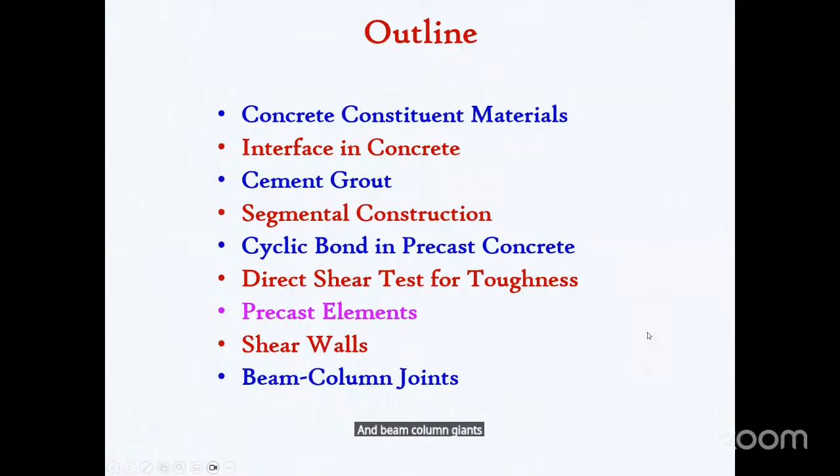The work involves a lot of other projects also, so consultancy or research or even interaction with other members in various fields. I'll talk something related to concrete constituent materials. Interface in concrete is very important, and cement grout related to precast construction. Briefing on segmental construction advantages and challenges, and the transportation system, bridge system, whether it is a reinforced concrete system or pre-stressing system, the cyclic bond in the case of rebars embedded in concrete. And the direct shear test for calculating or determining the toughness of the material, concrete, incorporated with various other ingredients. And the behavior of precast elements, shear walls, and beam column joints under earthquake loading and so on. Understanding the concrete actually.

So it looks like an old system, and we've just been reading here and there, somebody talking about this. But actually if you look into the constituent materials, the basic forms are like cement for binding purpose, sand and coarse aggregate for filling the volume, and water for reaction with the cement. So cement paste binds all the inert material. That was the concept or idea of using cement, water, and embedding all the large size particles.

Now along with this we come across voids, defects, vacancies, micro cracks, interfaces. And when you add something to change the characteristics in the early stages, like workability, compactness, microstructure, say high performance concrete, some kind of special material - this is very important for the engineer. These are all the things going to happen parallelly when you are going to manufacture or produce concrete. So each one of them will be a challenge. When you look into the individual things, a great study needs to be undertaken. It's not just one thing, because nowadays we find a lot of innovations in material technology.

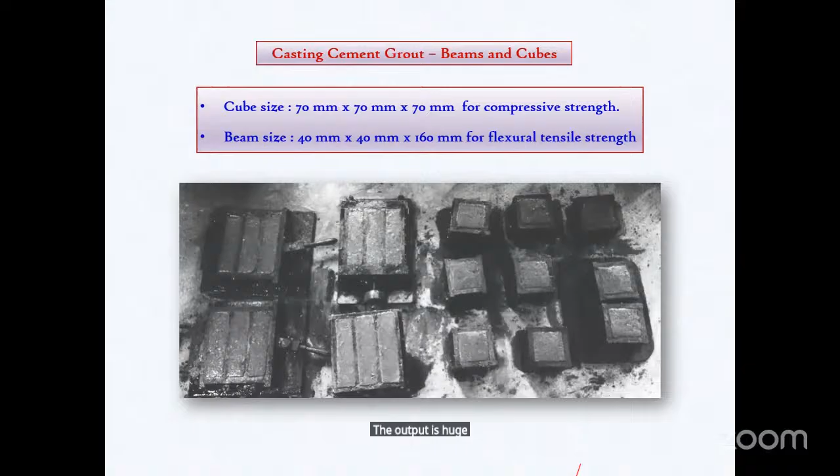So in this process, a product is identified and a very simple research is conducted in the laboratory. It's a preliminary investigation, but the output is a huge advantage for the construction industry.

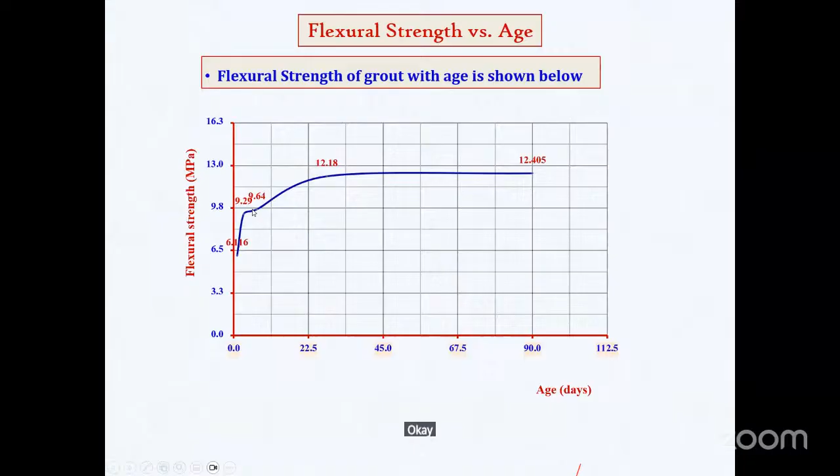In this process, we check the strength at early stages: 1 day strength, 3 day strength, 7 day strength, and also compare cylinders and cubes. All these were validated experimentally. For flexural tensile strength, at 1 day, 3 days it's 6.1, and at 7 days it's 9.2 or 9.29. It's a huge strength gain even in early stages.

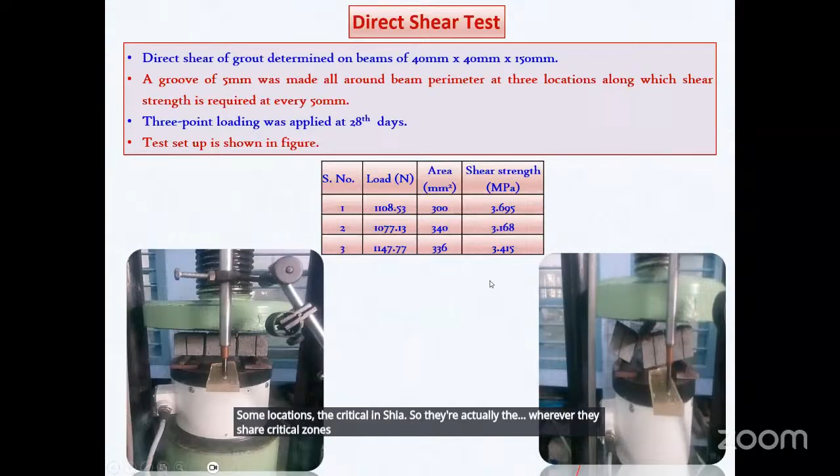This is the shear aspect, which is also very important because in all major constructions and structural components, some locations are critical in shear. So wherever there are shear critical zones, this cementitious product can be advantageously utilized.

Whenever the precast system is continuously exposed to environment, like rainy seasons for a week, you should be able to understand its water absorbing capacity, because this gives you the durability of the product. The aim is to have a structural system that lasts 100 years, not 50 years. So this property is very important - all precast elements exposed to or submerged in water should not absorb water significantly. This is another way of observing the quality.

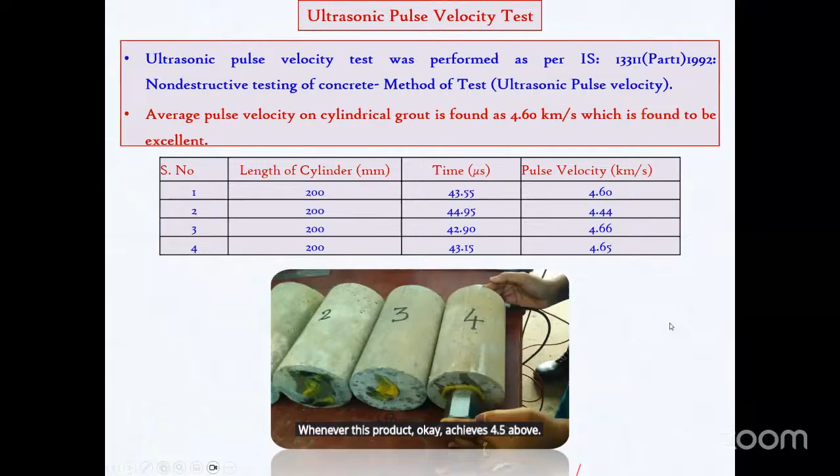The quality of concrete can be assessed by measuring pulse waves, that is sound waves, passing through concrete. This gives the density and the quality of concrete. Whenever this value achieves 4.5 or above, it is an excellent product to be used for special construction practices.

In flexural members with reinforcement bars in beams, the end regions are very important. The end regions of primary girders or deck slabs are subjected to very high shear force. Whenever the shear force is high, that means there is a high change in the bending moment, and the rebars will be subjected to very high horizontal stress, that is bond stress.

Sometimes if you don't provide sufficient anchorage length at the end regions of the beam bars, there is a possibility of pulling out of the bars. Particularly when aiming for structures to last 100 years, you have to be very careful, because end regions are vulnerable to pulling out of rebars, especially under high shear force, unless you provide sufficient anchorage length, not just development length plus additional extension.

In some cases, when the steel reinforcement reaches its full tensile strength, there is a possibility of pulling out. The end region should be properly anchored; if not, the bars will be pulled out. So the anchorage bond in such cases becomes significantly important.

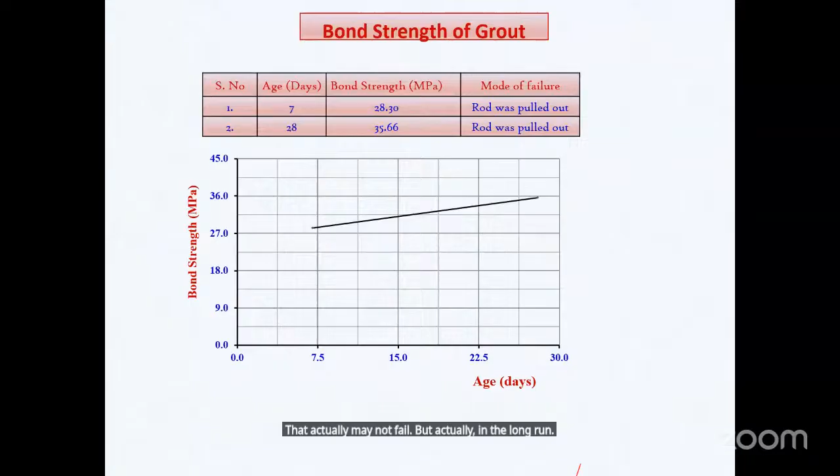When a bridge is designed for a particular defined load, and there is a possibility of accidental load, it may not fail immediately, but in the long run, the life of the structure comes down. So this cyclic bond response is very important. No code provisions are available now, but it is a kind of accidental load situation, since bridge structures experience very heavy loads.

Maybe it's a class A bridge, a class B bridge, or whatever. Sometimes bridges are not meant for higher loads but experience them anyway, and that is nothing but an accidental load for that particular structure. So what happens if a bridge structure subject to cyclic loading experiences an accidental load? What will be the outcome?

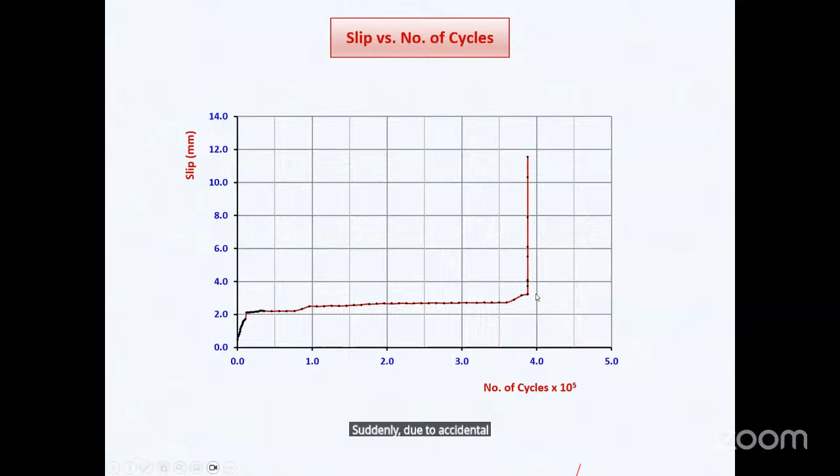From studies, when there is an accidental load, the slip exceeds the expected amount after a number of loading-unloading cycles, and the slip increases significantly. That means the rebars are pulled out of the concrete, and the structure may fail suddenly due to accidental load after a number of cycles. This is the slip versus number of cycles relationship: slip gradually increases with cycles, but suddenly due to accidental loads, the anchorage bars get pulled out.

This way, one can apply loading and unloading cycles. Loading-unloading curves can be drawn by applying the number of cycles, and one can study the bond stress. That is one thing.

What we found is that rebars, particularly in precast systems, flexural systems, primary beams, or even deck slabs like segmental construction, have end regions provided with skin reinforcement or stitch reinforcement, but due to cyclic loading, they may experience a kind of bond fatigue, so there's a possibility of failure.

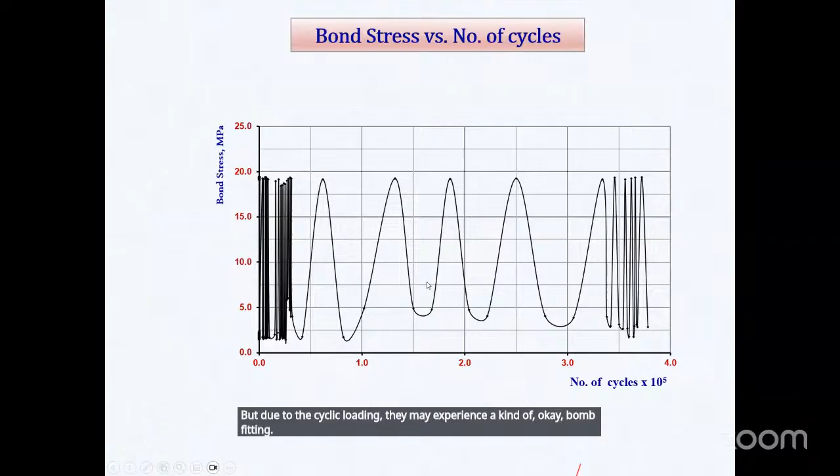An important point: when looking into research, a lot of laboratory studies on concrete specimens need to be done. There isn't much information about shear failure. Flexural failures are very clear and form the majority of research activities.

Studies on mode 2, that is the secondary shear failure, are limited because we don't flag it seriously; flexural moments are taken as critical while shear is taken as secondary. But sometimes shear is predominant, so members which experience high shear force need to fail in a ductile manner.

So for that understanding, in specimens failing in shear, what will be the toughness? That is the energy absorption capacity, the ductility of the system.

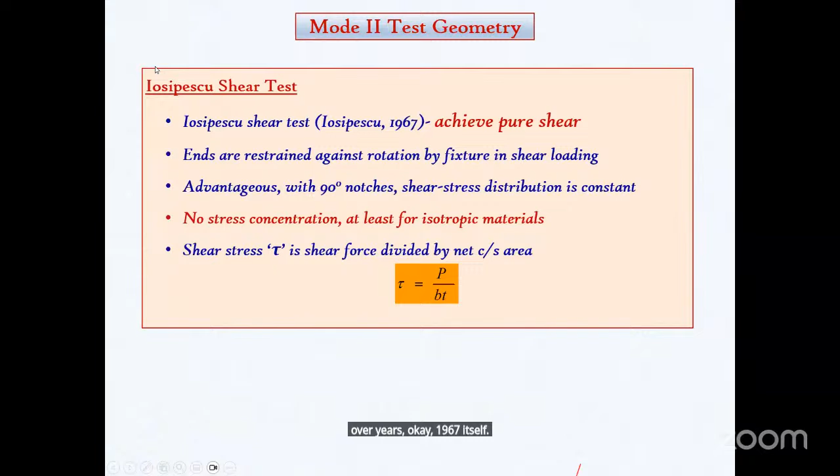In research, some specimens were already proposed over the years, as early as 1967. This one was proposed by a researcher, called the Iosipescu shear test. There are notches, with a support here and a support here, and the idea is to shear off this cross section.

But they could not achieve real shear failure. Later, someone changed the setup, but still they could not achieve real shear failure. This is the Bazant shear test, but again ideal shear failure was not achieved.

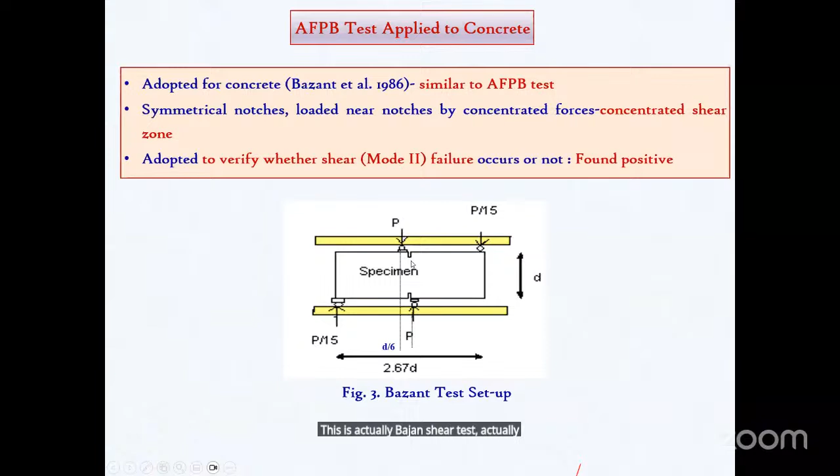After understanding this, a lot of papers were reviewed, understanding fracture mechanics, and a specimen was defined to define the failure plane. This is the geometry adopted, with the net cross section, and all around we have the notch.

A special supporting system was invented, and we could achieve direct shear failure here. There is no flexure failure, no mixed failure—just direct shear. This was special; a number of trials were made before we could finally achieve this.

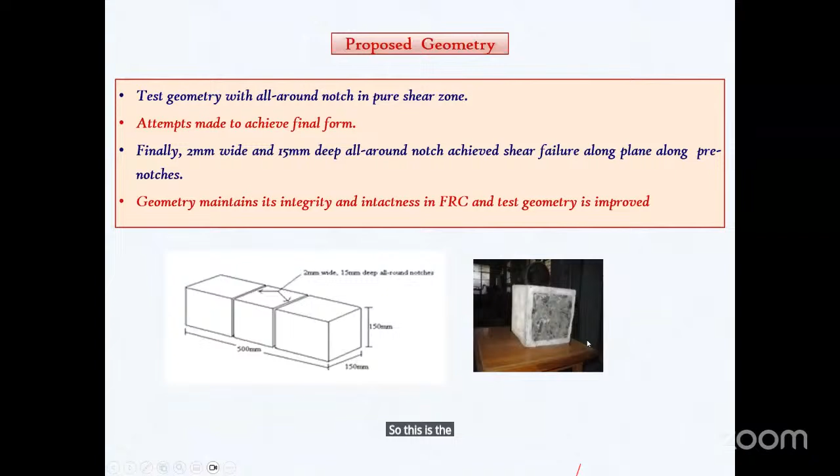Now, understanding the influence of randomly distributed fibers in plain concrete—because concrete is vulnerable to brittle failure in shear—to improve ductility in direct shear, the idea is to add a small fraction of steel fibers. Different mixes were proposed, everything the same except the fiber content: 0% for plain concrete, 0.5%, and 1% by volume of concrete.

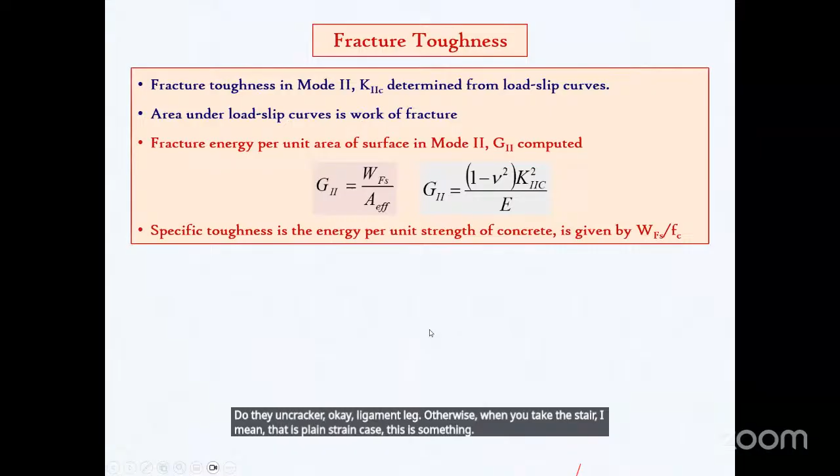So the energy absorption in mode 2, or shear failure, is the work of fracture relative to the uncracked ligament length, considering the plane strain case. This way the toughness of the concrete was investigated, and we found that as fibers are added to the concrete, it influences the failure mechanism and also the shear strength.

Shear strength increases, and there is an index calculated as the area under the load curve. As more fibers are added to the concrete, ductility increases, and after the peak load a longer descending curve is achieved. From there, the area under the load versus deflection curve is taken up to 3 times the deflection at the straight line part.

Delta is the deflection corresponding to the straight line, roughly elastic, part. We take the area up to delta and up to 3 times delta. So there is a larger area up to 3 delta divided by the area up to only delta, which gives an idea of how ductile the material is.

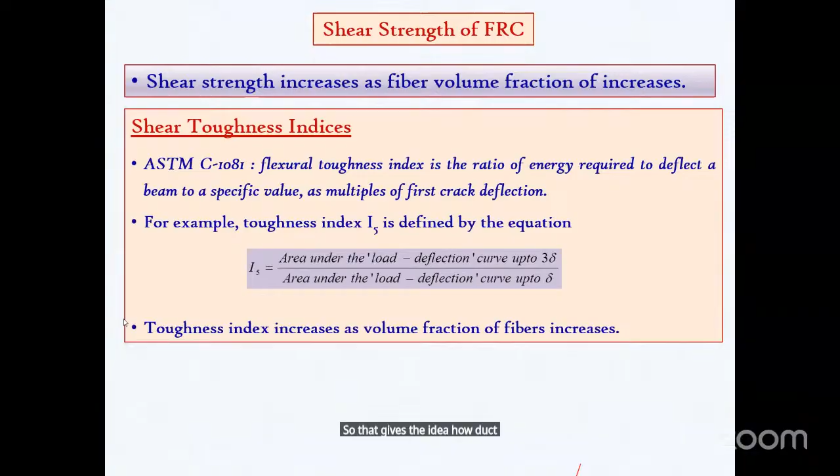So the toughness index increases with increase in the volume of fibers—not very significantly, but there is an improvement. Ductility is improved due to the addition of steel fiber.

Understanding the precast system is very important nowadays, because even since 1954 in other countries there have been standards prescribing the use of precast or pre-stressed systems. Precast systems are always accompanied by pre-stressing—they go together. Applications include building frames, parking structures, stadia, railway sleepers, transmission lines, and many other segments.

The precast system will be accepted everywhere you would otherwise think of cast-in-situ concrete. The only thing is, once you have the precast elements, bonding and connecting them together is important—integrating them. So we need to understand the methods to connect them, since weaker connections are possible.

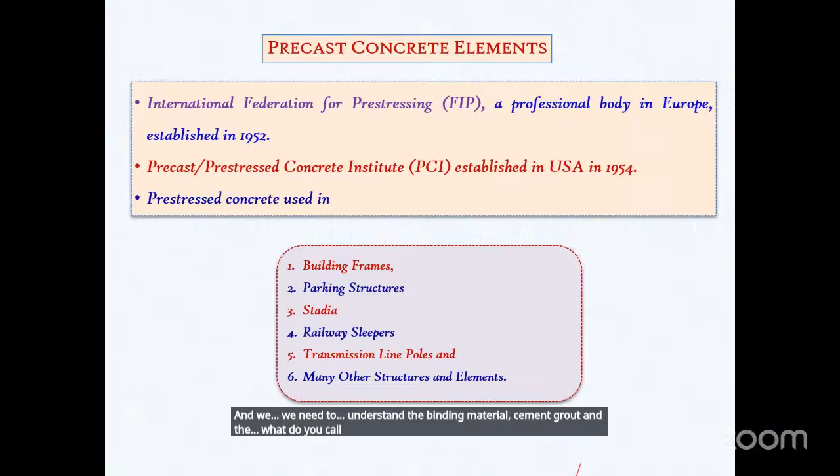We need to understand the binding material, cement grout, and the anchoring of the precast element—very important whenever we talk about this. In the market you'll find solid elements, and we can create hollows in them to reduce the self weight.

And whether you have the labor to connect them, skillfulness, or the materials required to join, and once you think about these things, what will be the maintenance of that structural system, and whether the components can be reused and recycled. It's not like yesteryear - now we have to think about whatever you do, that has to be replaced, recycled. So these are some of the factors to be considered when you think about any precast system.

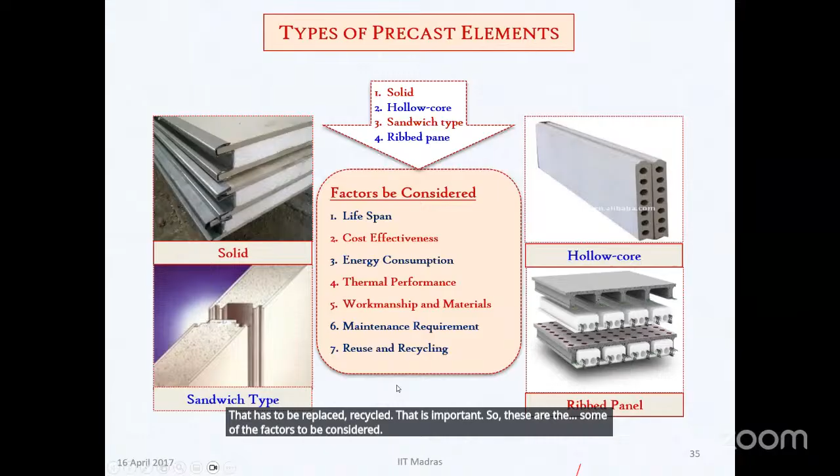But once all these important components are cast, leaving the reinforcement required, you can bring them and join them together, and the gap can be filled with grouting material, and the connections can be joined by stronger steel material.

When you look into this, the advantage will be speed of construction. Previously projects were delayed due to seasonal and environmental problems - in the rainy season it's completely halted, and you can have only 3 or 4 months effectively. But now, in any season, these elements can be cast under a controlled environment, and speed is increased significantly. So you can have the foundation, the casting of primary members, prepare all the members ready, before the aggressive environment or whatever seasons affect the practices.

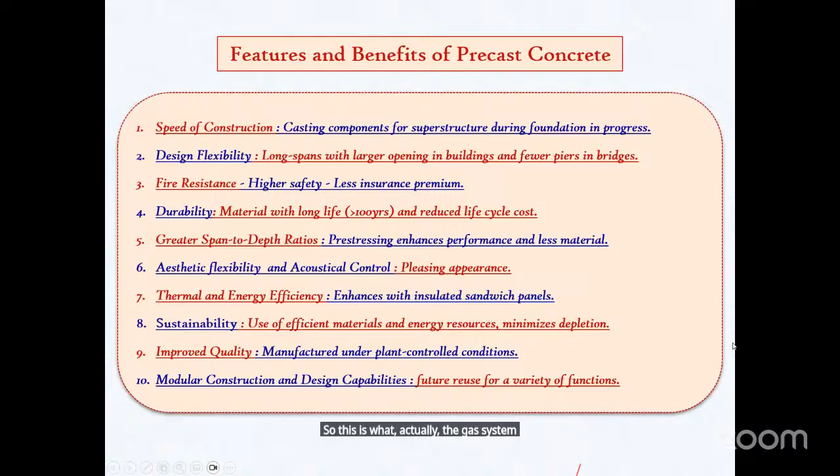So this is what the precast system actually is, and hence it has to be looked into with a lot of investigation and thinking. These are all some examples. So the precast element here, this widened precast system, and all these numbers of precast elements can be joined together to come out with an aesthetically, architecturally pleasing system.

This is something, runway is being constructed. Now, actually, the residential building or commercial building or stadia - we have the beams, we have the slab, we have the columns, we have the steps. All these things are readily made, required shape, required size. Only thing is, you know how to fix them. So we have to understand the fastening technology, connection technology, and the binding medium.

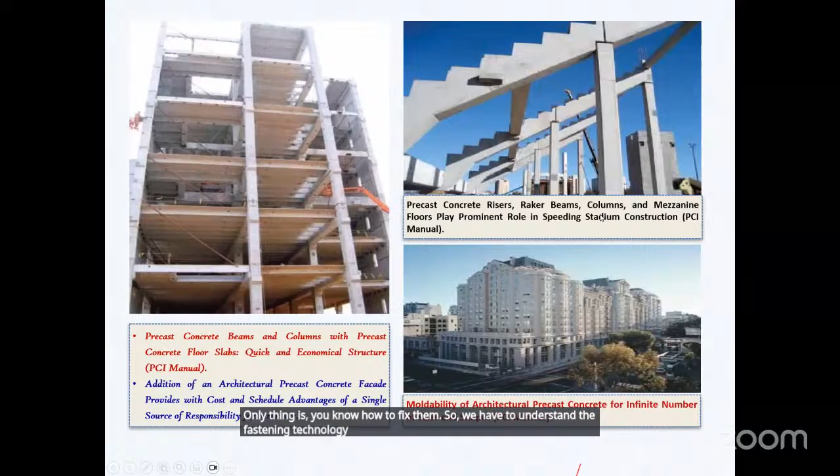This is something in mass construction - all these housing or dwelling units can be fabricated, 2 chambers or 3, ready-made, and internally everything can be provided. Now, this is something in mass construction, like you want to have similar spans, so there's a big advantage - lot of money being saved by avoiding different sizes or shapes. The same size, same shape can be produced and used, and aesthetically it will be very pleasing. And here the gap can be cleared or supported by readily made deck slabs.

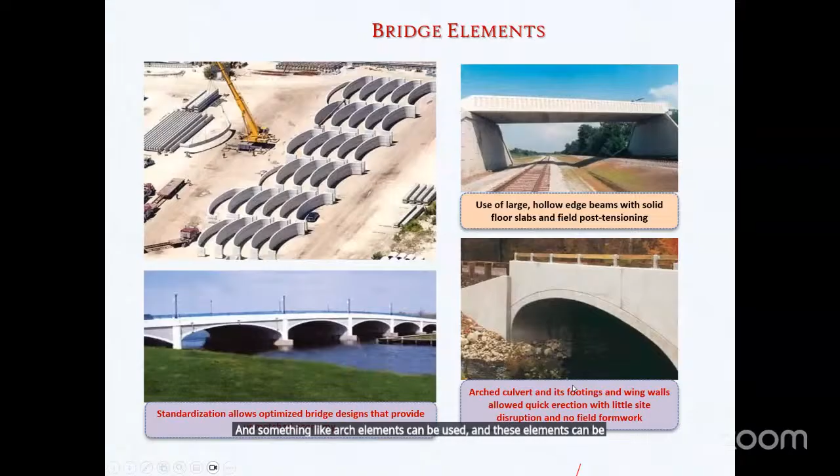And of course, the sleepers already know. Now, this is a typical bridge, for example practical. The foundation was completed, pier was completed, pier cap was completed, and these pink colors are the bearings. On the bearing, actually, the superstructure comes. This is like a 45 meter span, and this is the main part, the main waist, or the spine of the bridge in the longer direction, 40 meters, same cross section, but it may be curved, it may be changed, it may not be straight. But we have the left wing and right wing - elevations may be different depending upon the curvature.

So this is a typical cross section of a bridge, okay, a flyover. This is the main part, connected with the secondary part, the left wing and right wing. You have the precast element, segmental construction. All these segments will be connected by pre-stressing in the transverse direction. And all these yellow elements, called spine element segments, provided in the length direction, each 15 or 20 meters, are again connected using longitudinal pre-stressing. You do this, maintain the levels, and bring them together.

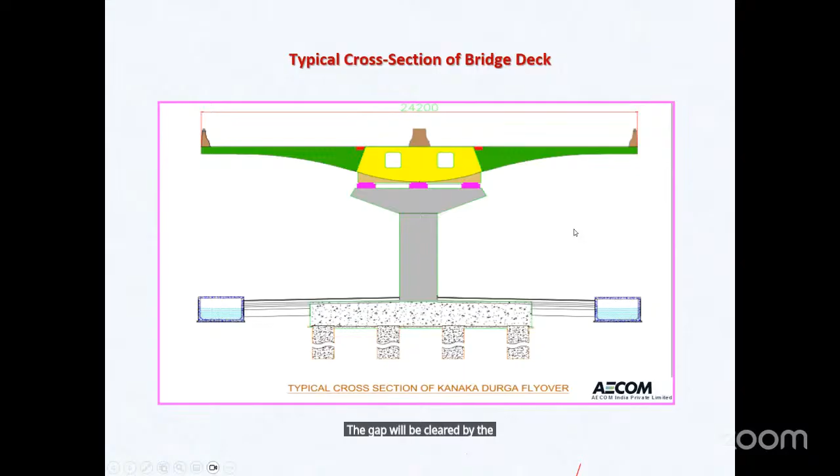Then once the pre-stressing is done, the gap will be cleared by the grout. Next day, this can be ready. Now, this is one spine unit - here, this is the skin, this is the stitch reinforcement, this is the end reinforcement, coming from the deck. So this top reinforcement will be overlapped with another reinforcement coming from another segment. So these rebars will be overlapped, and that gap will be filled with your grouting material.

Now, these are the provisions - ducts are provided. Through the ducts, the strands will be sent, or even bigger pre-stressing elements can be sent through. Provisions are made for how many ducts you require, how many strands to be accommodated, and how to connect the top reinforcement - that is the stitching reinforcement. This is the main component.

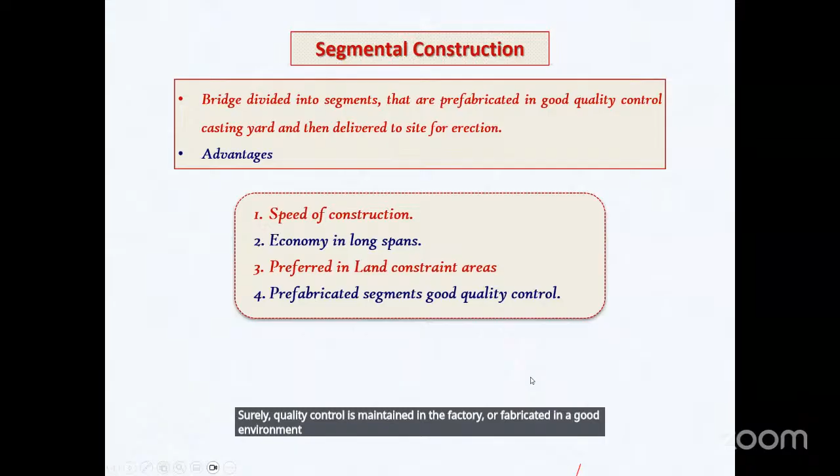Like this, 40 meters - these elements will be joined longitudinally by longitudinal pre-stressing, and the wings will be connected by transverse pre-stressing. In addition, the flexural reinforcement, the stitch reinforcement, will be connected, and that will be completed. So now, speed of construction, economy in long spans, and wherever land cost is high and flyovers are required. The prefabricated segments will be of good quality - quality control is maintained in the factory or fabricated in a good environment, hence overall quality is so good, and one can think about 100 years of its longevity.

So parallelly, once the main structural system is completed, then one can think about it. In the top elevation, these are the different wings connected - longitudinal pre-stressing, transverse pre-stressing, and this gap is filled with your grouting material. This is your longitudinal direction, this is the transverse direction.

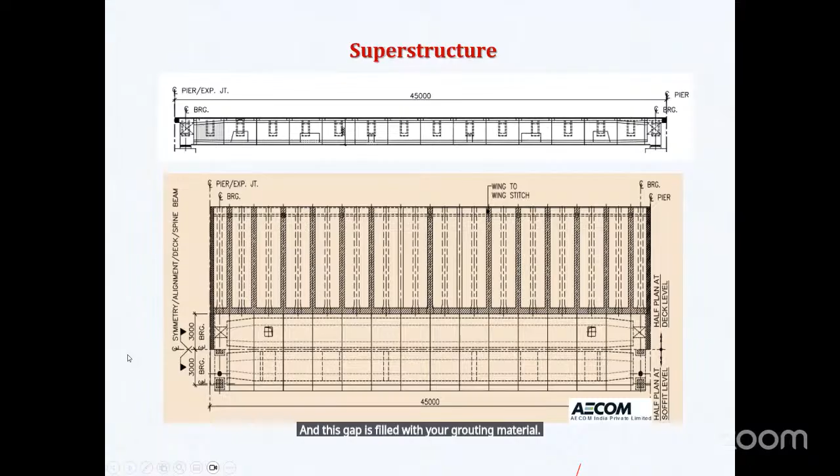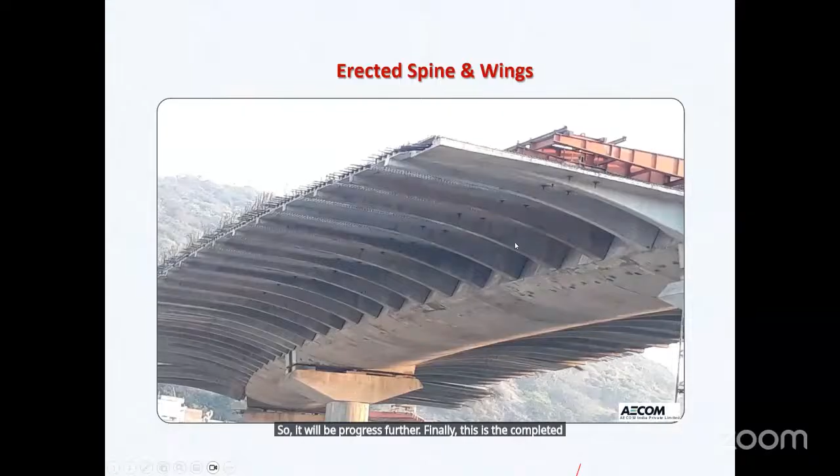This is the symmetrically balanced way the construction is being done. In the longitudinal direction, the spine will be constructed first, and in the transverse direction, the wings will be joined together. It will be progressed further, and finally this is the completed structure, with all other secondary units added.

When there is flexural compression or tension, the lugs or deformations on the bar experience a kind of inclined force. Resolve them into the horizontal component and the transverse or radial component. The horizontal component will be the bond stress, and the radial component will tend to rupture the concrete cover, which is the surrounding concrete.

It is very important: unless you provide sufficient length of anchorage reinforcement, you cannot withstand the bond stresses developed. Otherwise, there is going to be split cracking below the reinforcement bar up to the bottommost region, and in the horizontal direction between the rebars, and on the side where we have the side cover.

Otherwise, when a member is subjected to earthquake loading, the top bars and bottom bars will be experiencing bond stresses. It's very important to understand bond behavior, but there are so many factors influencing it.

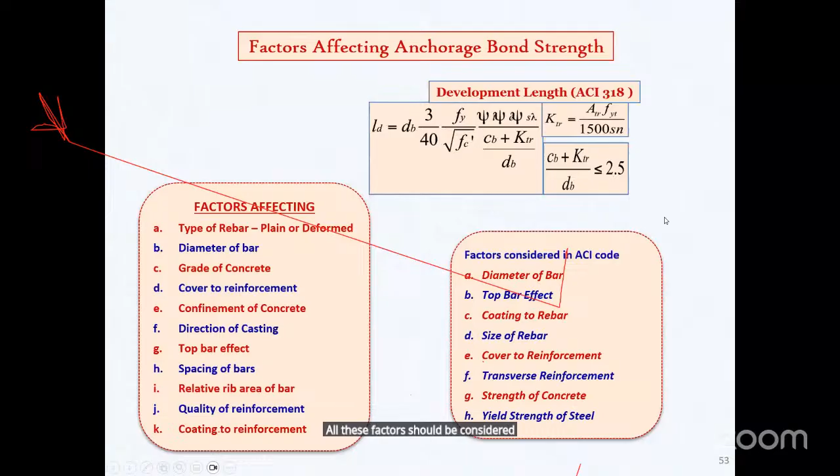Now another important thing is the special element, the shear wall. Shear walls are required in any multi-storied building. Wherever we have ground motions or lateral forces, you need laterally resisting elements, shear walls along with columns.

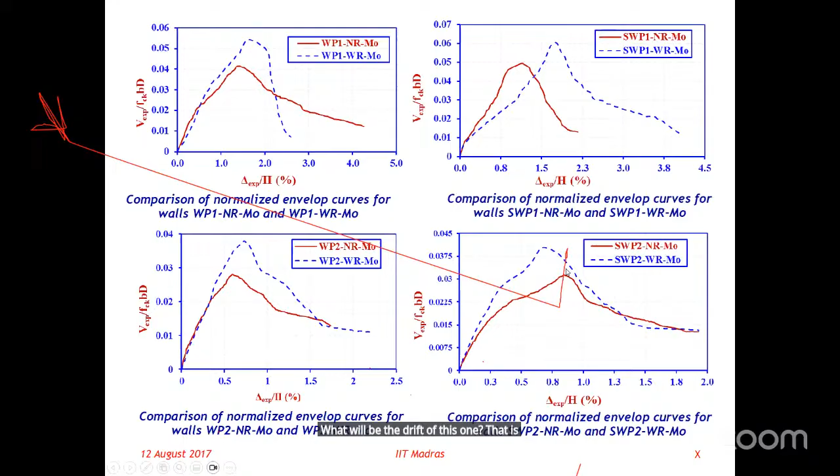So what will be the drift of this one? That is the displacement at the top over the height. This is a hysteresis response, cyclic behavior. We found that with reinforcement provided, it exhibited better capacity and better hysteresis behavior. Using that, theoretically one can develop a model.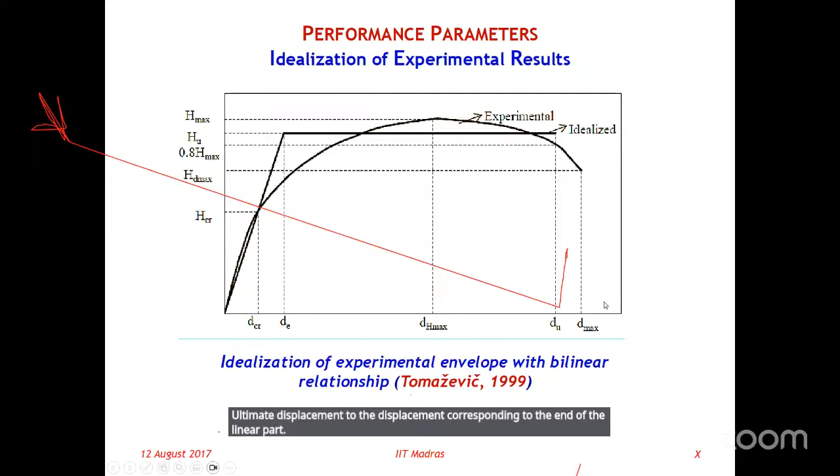Different reports give these definitions, and from here comes the earthquake characterization - the deviation, which is stiffness degradation. Stiffness decreases with increase in displacement, because whenever lateral force acts on the shear wall, cracking is possible. Depending on the extent of cracking, you may have more degradation - so the stiffness decreases with increase in displacement or cracking.

So there's a comparison of shear walls with and without reinforcement. And this is the final one, the beam column joint. It is a special element, analyzed with importance given based on real earthquake related experiences.

These elements are vulnerable for shear. Even the red part, this is the confined region between the concrete from the beams on either side and top and bottom columns. The red portion is called the joint, which is common to beams on either direction and common to the column - that is called the beam column joint.

When loads were only gravity, this was not given much importance because it was only a kind of support, with no vibrations, no cracking, no inelastic deformation. But now the loads are different - you cannot just support the beams or have the columns themselves. Beams and columns, everything must be integrated, with transfer of loads from beams to the joint and from joint to columns, or vice versa.

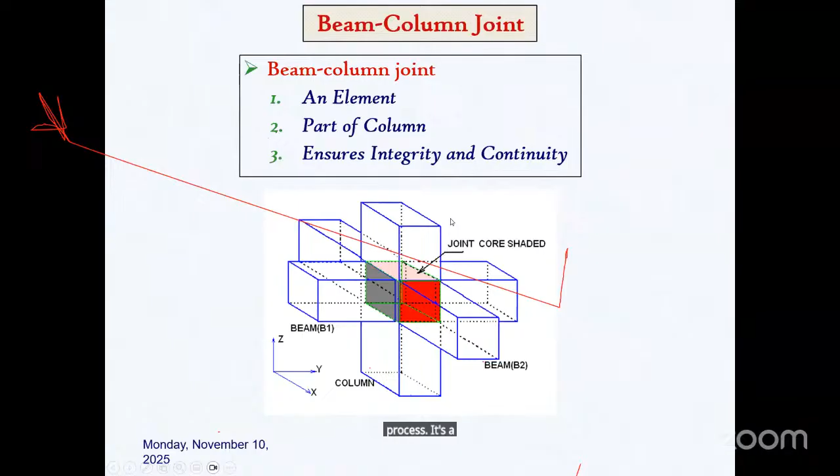This joint region is a common area which ensures the integrity and continuity of the transfer of forces. It's a part of the column, but as an element it should be taken separately. So then, the joints under gravity loading are not significantly deformed, with no cracking at all - they are within the elastic limit.

But the type 2 joint is the one experiencing special loads - earthquake loads, wind forces, or blast loading effects. They will have nonlinear deformation, nonlinear straining, and cracking inside. So they have to be specially designed for this special load. It's a typical joint region subjected to loading.

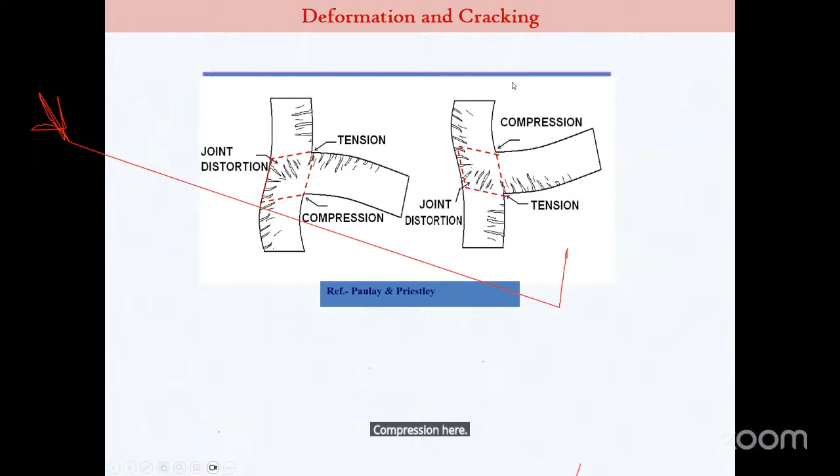So we have cracking like this in the column, cracking in the column, cracking in the beam. When you reverse the loading, the tension becomes compression, and compression becomes tension, something like that. So it's altering the sign of moments.

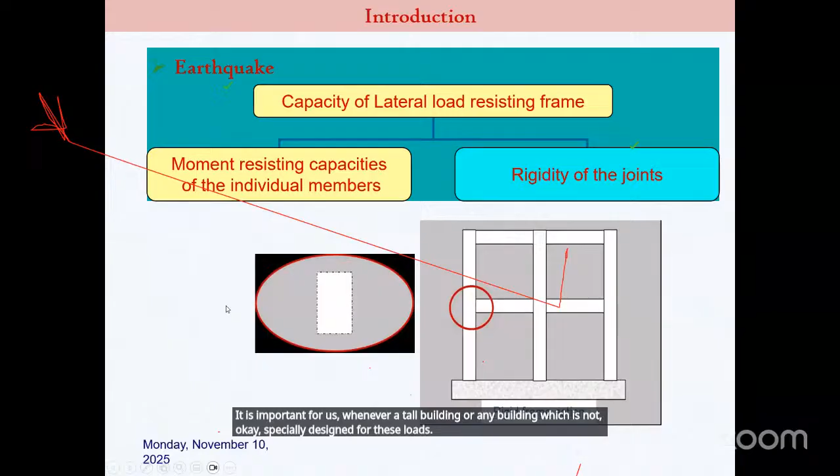Now you can see a plane frame subjected to earthquake loading, and if you target the beam column joint, the joint region will experience diagonal cracking. It is important for us whenever a tall building or any building is not specially designed for these loads - they definitely fail in the joint region because of this action. Because the building is moving in the lateral direction, it gives a kind of diagonal cracking, shear cracking. So it's important that all possible modes should be identified, and you have to design the system accordingly.

Experience the possible loads and identify the weak points. The joint can fail, the beam can fail, the column can fail, but we need to ensure that no column and no joint should fail - only beams should be made weaker. That is achieved by changing the design and connection detailing, shifting the plastic hinges due to lateral force. In the existing system, the majority of buildings were not designed for earthquake loads or special loads, and we don't find any special detailing in the joint region.

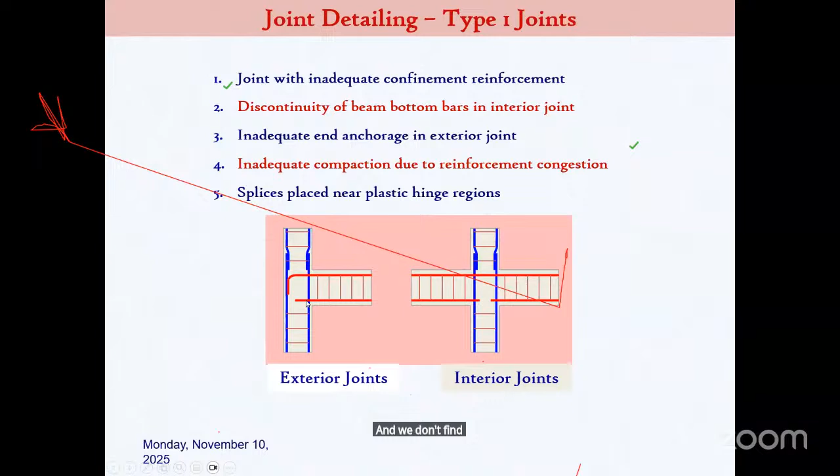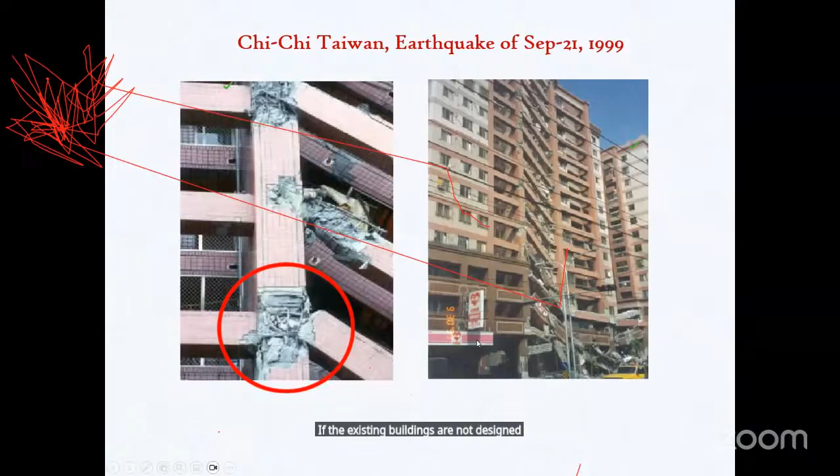But whenever you experience earthquake like this, the joint region without special reinforcement will fail due to high shear force transmitted. Hence these joint regions are very, very important. Whenever you have multi-story buildings, if the existing buildings are not designed for earthquake loading and you want to protect them, then you should analyze the thing.

So therefore, you have to understand the shear transfer mechanism. The shear force in the joint region needs to be calculated, and hence what is the shear capacity of the joint, and what is the weakness and how to protect it.

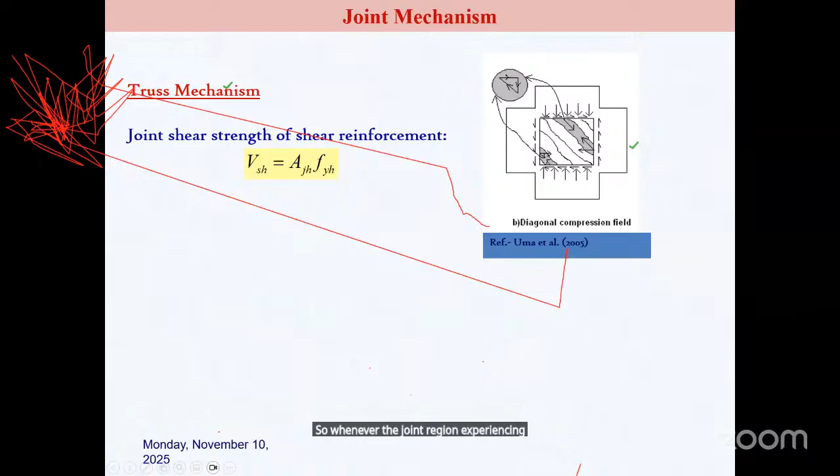So this is actually understanding the formation of the strut. Whenever the joint region experiences loading, unloading, pulling, pushing kind of loading, the joint region experiences very high shear forces like the strut formation and inclined cracking. And whenever the cracking takes place in the joint region, the stiffness comes down and load carrying capacity comes down.

So therefore the reinforcement should be provided in a different form - that is actually joint reinforcement. So to confine the concrete, reduce the joint stiffness degradation, slipping of the beam bars can be minimized, and the hysteresis response can be improved, energy absorption capacity can be improved.

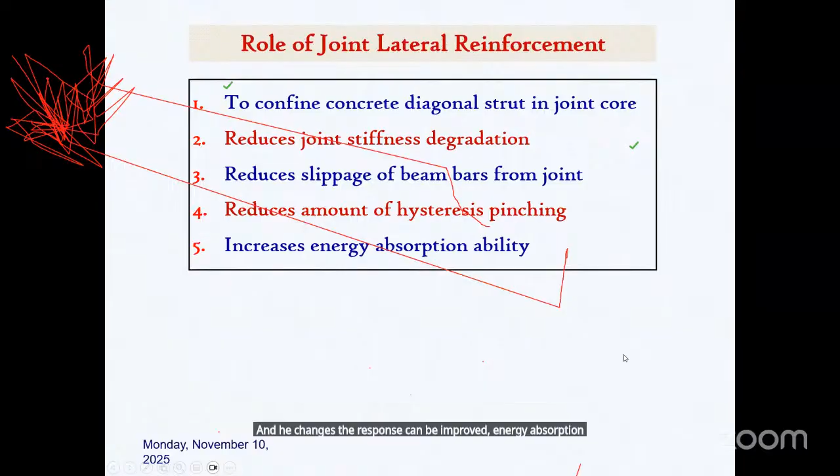And hence actually the factors influencing the anchorage - you should think about the joint region should be properly confined, the diameter of the bar, proper anchorage length, and good quality of concrete in the joint region. So all these things actually have to be identified, and we have to analyze and look into this, and then standardization - that is actually under extreme loads.

So we have to be careful, and special elements should be preferred. This is what actually was planned for today. Thank you for the patience, and thanks to the organizers once again. Thank you so much.

And this is actually something many people are doing research on using byproducts, but they don't understand the basic reaction actually. It's important. When they understand what exactly is happening, a lot of discussions can be made in the thesis, to demonstrate to the other researchers. But they should understand it clearly - what byproduct they are adding, what will be the reaction with these basic reactions, and hence the final outcome. So it's very, very important for researchers who are doing this actually.

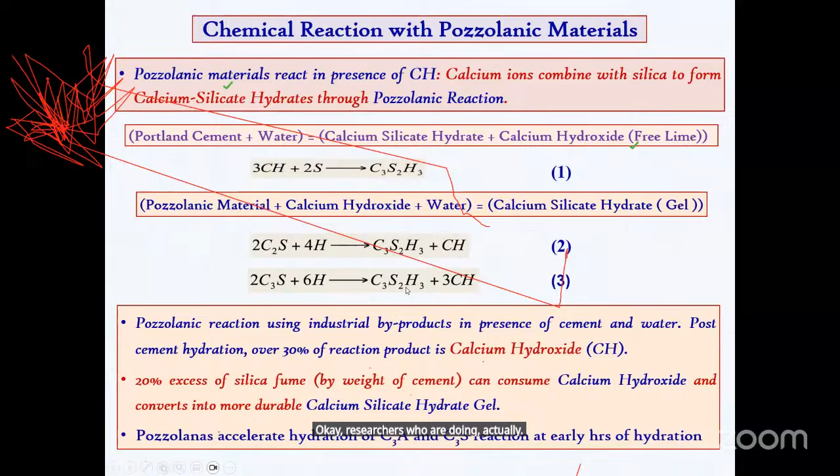And this is another one actually - not much work has been done, it's very difficult to do. You take different surface characteristics of aggregate, and you can think about different cementitious material, and try to improve the interface, because the interface is the only thing trying to improve the overall capacity of concrete. Of course, when this is made very strong - for example this is cement matrix and we have the interface - cement matrix is stronger, interface is very stronger, and actually aggregate also very strong.

This will become a very brittle product. That's what actually happens - so when this is stronger and interface is stronger, then aggregate may be failing due to transgranular type. If the interface is not strong, then you'll find intergranular, a kind of bond failing - it's a weak matrix.

So this is again cement grout itself. Commercially, there are different products available, with all other characteristics required - shrinkage related, strength related, bleeding related, and other durability aspects. So a lot of work can be done on durability, even in cement grouts.

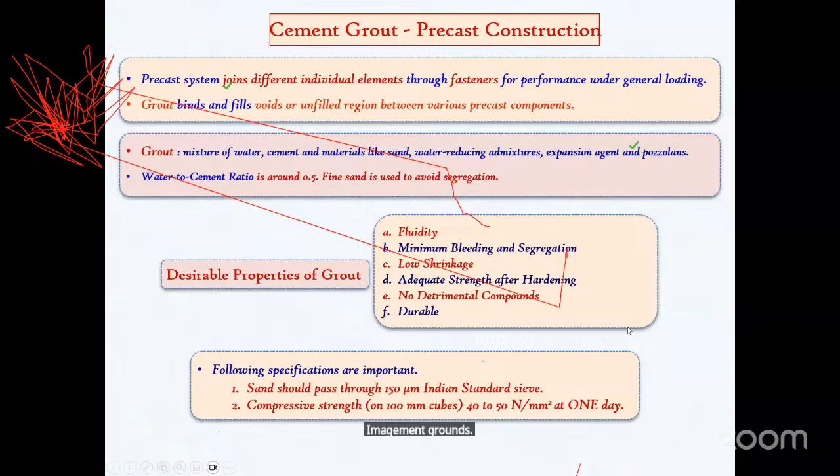This is what actually basic research we did, preliminary investigation, as a part of research-cum-consultancy. Somebody gave this material and we converted it into a research program. You take the structural components under different loading conditions, individual elements, and you can model it in the laboratory or in your computer. You can work out shear walls by changing different characteristics.

Yes, sir. Thank you. Yeah.

Good evening, sir. One more question I have related to interfacial transition zone - how can we measure the ITZ, except using SEM? Scanning electron microscope, sir. Yeah, that is true.

Even you can go to the magnification, other levels also - more than micro level, but now it's advanced, you can go to nano level also. Understanding that, you can find the best way to fill that gap and improve the characteristics.

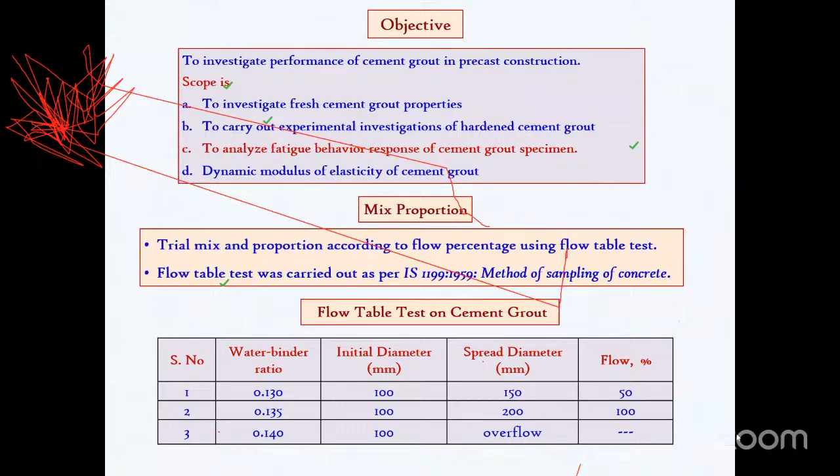Actually, do these questions come to mind from any other participants? Yeah, please. Any questions?

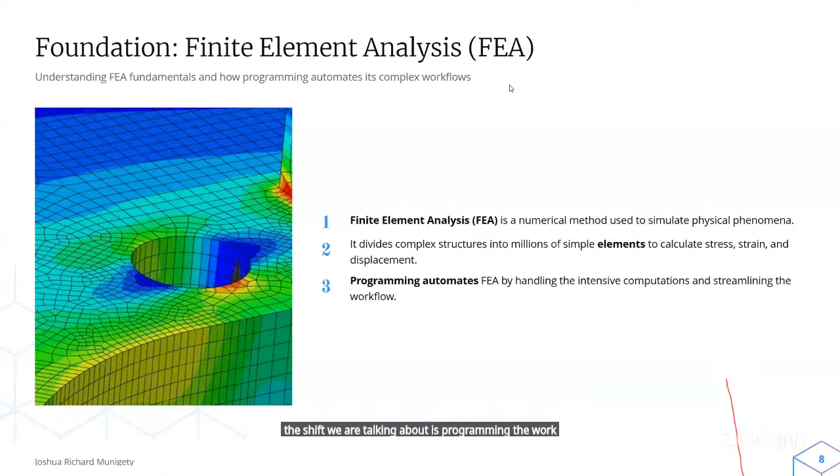Historically, we have been users of FEA software. We build a model, click run, and look at the pretty pictures. The shift we are talking about is programming the workflow around the FEA, which we'll see in the next few slides.

The automation workflow starts before you even run the analysis. This we all know is called pre-processing. The problem is that manually building 10 variations of a model to test different bay spacings, for example, is incredibly slow. The solution is to write a script.

We can use Python or even C# or even Excel VBA to automatically generate the model geometry and assign properties. A great example is a script where you just input height, bay spacing, and column size, and it builds the entire 50-story model for you. This is the core of what we call parametric analysis.

Next comes the solving phase. Running one analysis is easy, but what if you need to run 1,000? With a batch analysis script, you can. You can tell the computer to run 100 analyses overnight, testing 100 different beam sizes, and have the results on your desk in the morning.

But we can go even further with probabilistic analysis or Monte Carlo simulations. This is where we run thousands of simulations, each with a slightly different material strength or load based on statistical distributions. This lets us move away from a simple factor of safety and towards a much more realistic probability of failure, which is a major leap in the design.

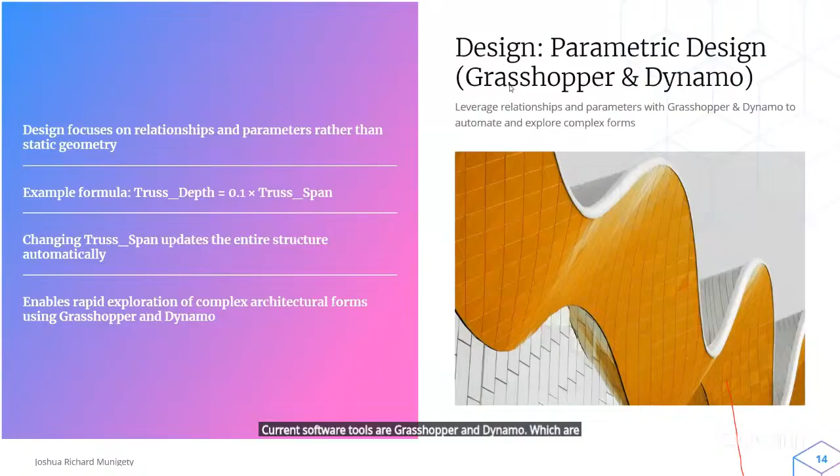The key tools for this in current software are Grasshopper and Dynamo, which are very popular for complex architectural forms.

Let's be honest, the number one bottleneck you'd all be noticing already in the design office is not analysis, it's code checking. It's the mind-numbing task of checking every single beam, column, and connection against the design code, like AISC 360, or the Indian Standard Code for structural steel.

This is a perfect task for automation. We can write a script that takes all the analysis forces like moment and shear, pulls the member properties, calculates the capacity, and compares the two. The result is a pass or fail report with utilization ratios. The engineer's job is now to review this summary, not to create it.

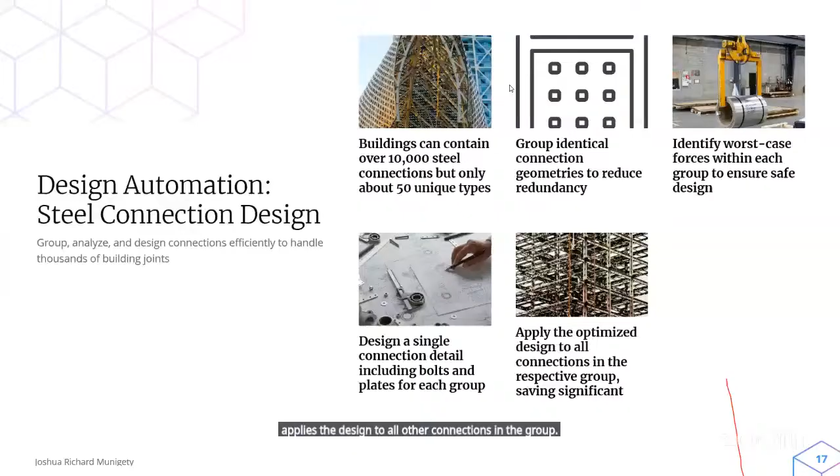Next comes the BIM 3D model, which is most widely used on all sites nowadays. The most important thing to understand about BIM is that it's not just a 3D model. A program like Revit is at its core a programmable database. Every single object in that model, every beam, column, and bolt, has geometry, but it also has data.

This data, like material, size, status, or cost, is fully accessible. And because it's a database, we always have the opportunity to write code to read from it, and more importantly, write back to it.

For many engineers, the gateway to programming in BIM is through visual programming, like Dynamo in Revit. You don't even have to write lines of text-based code. Instead...

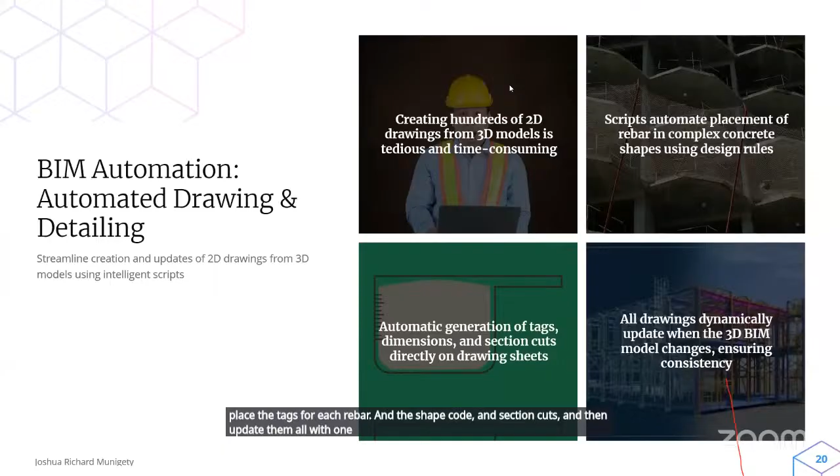Another huge win, which we do here day in and day out, is automating the bill of quantities or takeoffs. The old way, as many of us have done in the past, involved a cost estimator with a set of 2D drawings and a highlighter, manually measuring and counting. It's slow, and we always need a checker as well because it's slow and prone to error.

The new programmed way is a script that runs on the live 3D BIM model. The script can instantly and perfectly calculate the total tonnage of steel broken down by shape, or the total volume of concrete broken down by strength class. This means you can get an accurate cost estimate in minutes, not weeks, and you can rerun it every time the design changes.

Now the last part of this session is structural health monitoring, which is one of the important tasks as well. This is majorly a shift about the life cycle of a structure. SHM is similar to a nervous system for a bridge or a building. It's a network of sensors like accelerometers, strain gauges, and fiber optics permanently installed on the structures. These sensors generate a massive continuous stream of data 24/7 for the entire life of the asset. This is a classic big data problem, and it's a perfect fit for programming.

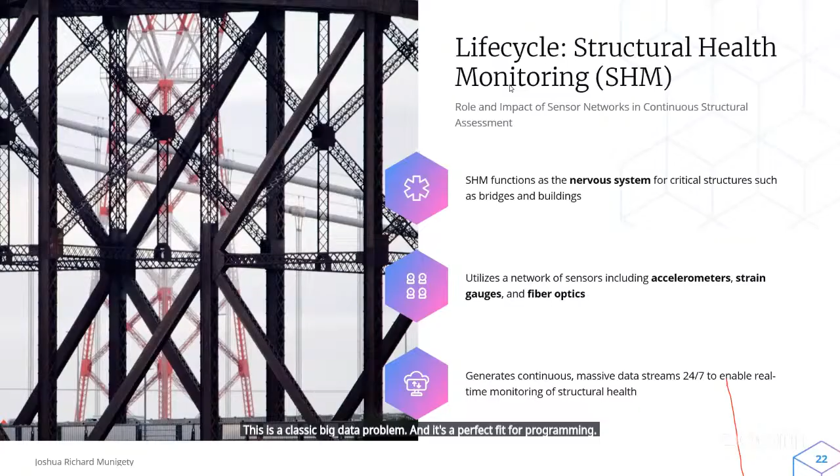Here comes the lifecycle programming for SHM, where most of the data is 99.9% noise. So the first job for a program is to filter and clean it out. Next, we use anomaly detection, where the building's normal vibration pattern can be automated to flag any strange behavior that doesn't fit the pattern. It can also prompt alerts for automated email notifications, triggered when an anomaly is detected, for example sending a notice that sensor 12 on bridge pier 4 has detected anomalies.

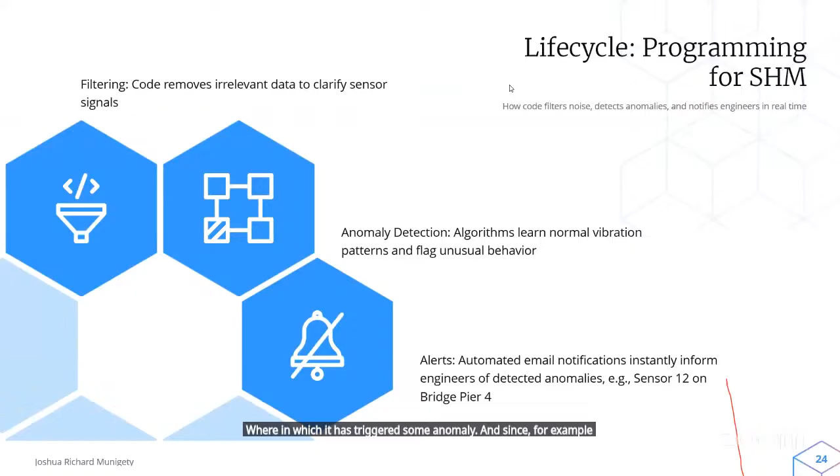Before I move on to the next section, I'd like to show some examples I've done in the past. It will be more interesting to focus on Excel, since we use it as a day-in, day-out database in the office. Here I'm showing an example of machine foundation analysis. When doing this analysis, we need parameters like mass, the damping ratio, amplitude, and velocity displacement. So here I've taken this database.

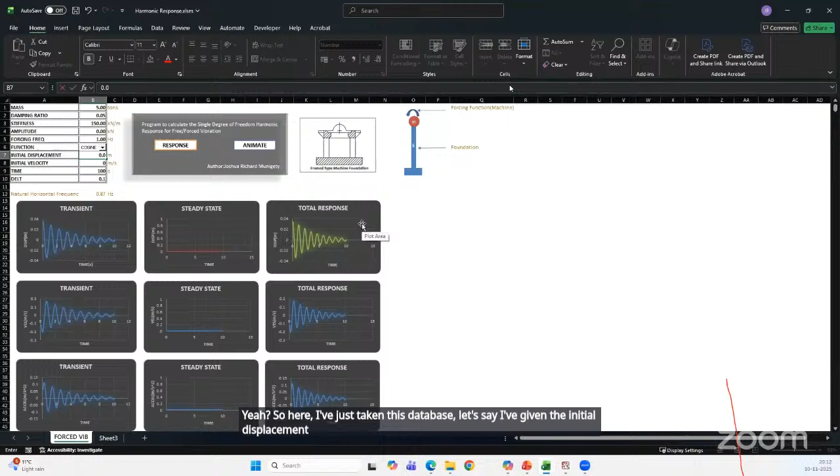Let's say I've given the initial displacement as 0.05, and what I try to do is predict the response. As you can see, all of this program I've written in Excel, and it's able to give me the overall response with respect to transient and steady state. So this is the overall response, as you can see.

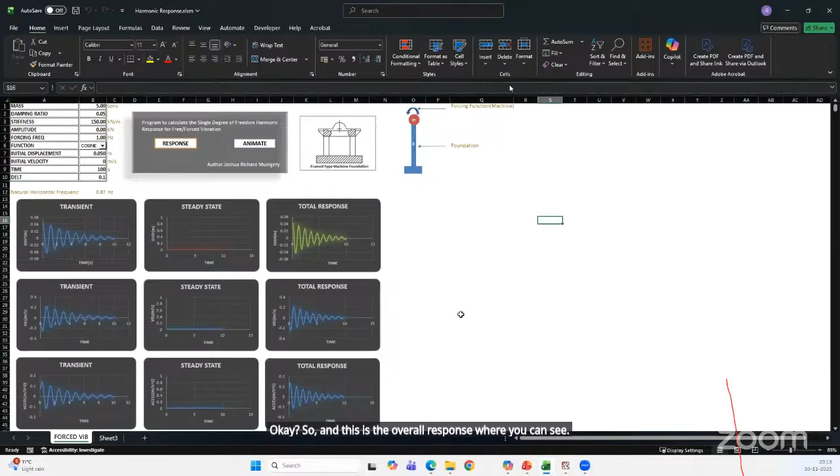Now, in addition to that, I want to show the capability of Excel, what all it can do. If I want to know the free vibration of this foundation system, which I've idealized as a single degree of freedom system, I'll just try to show the animation.

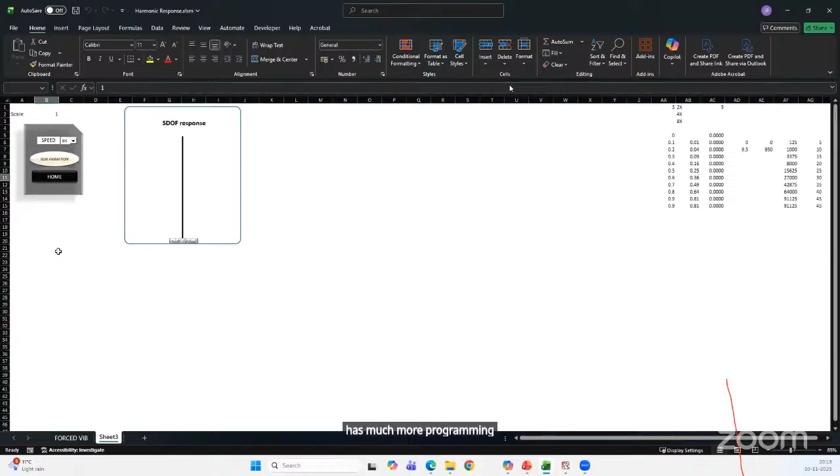As you can see, Excel, what we normally see as a database, has much more programming capabilities where you can simulate not only the static response, but also the dynamic response. This is one example of what Excel VBA can do, since the script is written in Excel VBA.

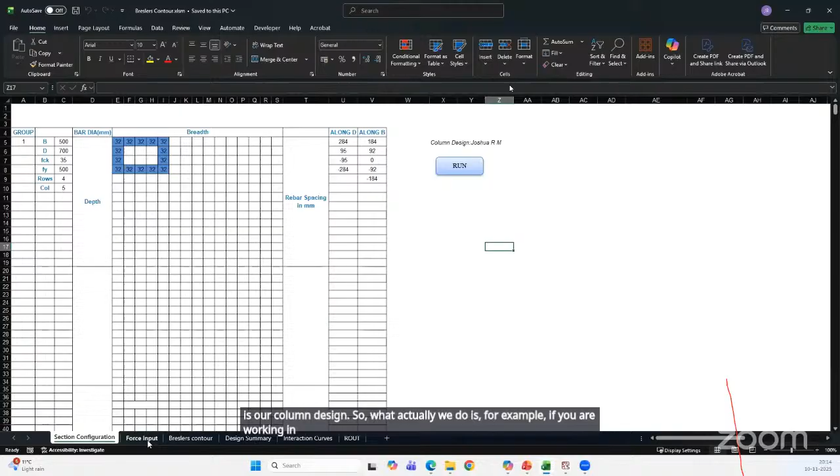The second example I want to show is our column design. When working in STAAD Pro, SAP, or ETABS, we always try to get the member forces, and you can see for one member how many load combinations we have. Instead of doing the design in STAAD Pro itself, because it has its own constraints, we try to put the practical rebar diameter from the site, and we can create groups of such cases and assign a group number.

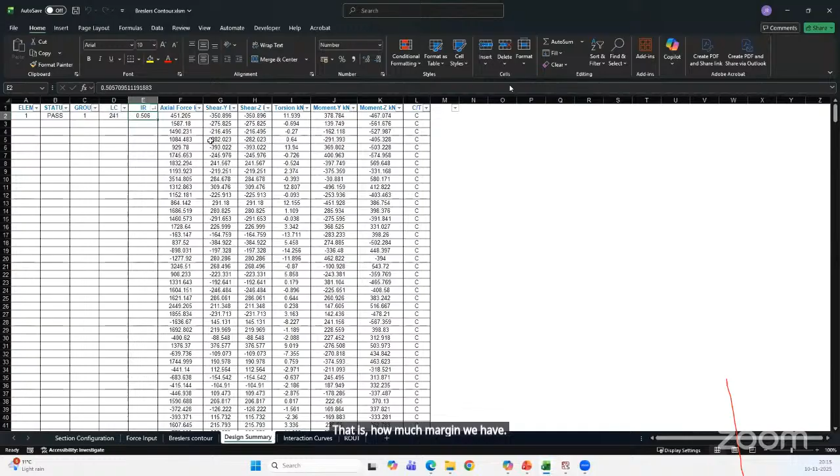Afterwards we run the column design, and the output gives the governing load combination along with the utilization ratio, or interaction ratio, showing how much margin we have. In addition, these are the interaction curves with respect to the major axis and minor axis, and this dot represents your P and M coming from analysis, from which we can predict how much margin we have.

This way of working not only makes the engineer more robust with the database, but also makes them think about whether the reinforcement from the site, or even the practical diameters, aligns with what needs to go into the design parameters, which can eventually be fed back into your Tekla model or any 3D reinforcement modeling software.

I want to show you one more example. As you know, we have so many load cases and load combinations. Someone could say we can just use the software's inbuilt load combinations, but in industry, because of client requirements, not all load cases can be captured within a set of codes and standards, since codes and standards are only guidelines. So we need to create our own load cases.

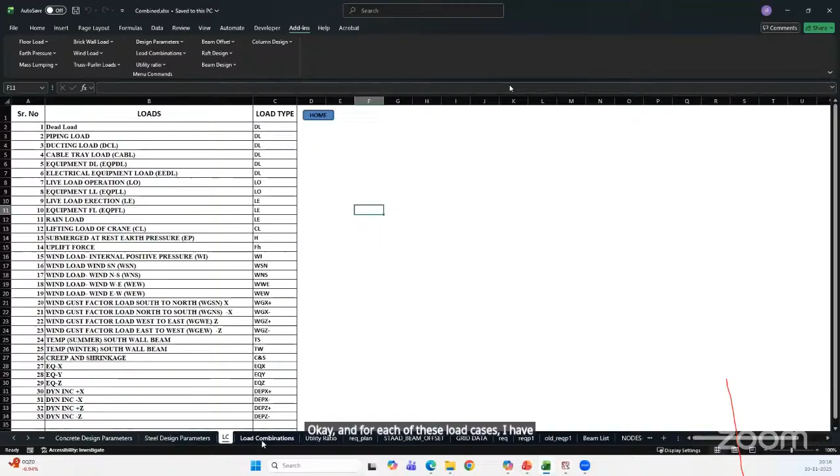For example, here I've given the load cases, and for each of these load cases I've given the load type, and for each load type we've given the load combination factors. So any engineer working on a project can feed in the data of all the load case factors coming from the design code.

In addition, I've developed this add-in, which gives you all the parameters, and I can even generate the entire model from Excel, because between Excel and STAAD we have something called the Open STAAD API. With this grid database, we can generate the entire model by means of parameters—if the grid spacing changes, we can change it here, and the software automatically picks up the data and generates the model.

Let's go back to the load combinations and try to generate them. As you can see, it has generated the load combinations, and this is what comes out from the Excel program—a set of load combinations as per the syntax of a given software. Here I've taken the syntax of STAAD, so it has given the STAAD syntax, which you can copy and paste as a text file into the STAAD file.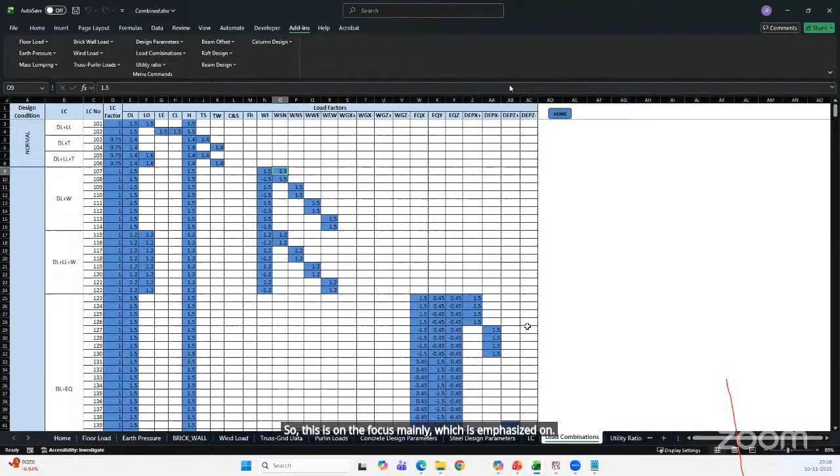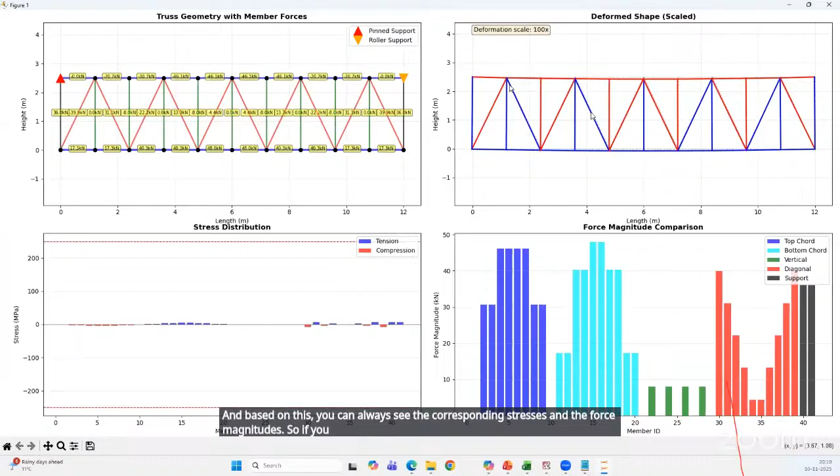This is what actually comes as an output of this code. You can see the number of spans which I have given as an input, the height and the width. And based on this, you can always see the corresponding stresses and the force magnitudes. So if you want to change it, it's just a matter of seconds - you can just change the number of spans here and rerun the entire code.

So such is the capability of the so-called parametric design and its usage. From my past years of experience, I have been very well using this kind of parametric design, which would save a lot of time as an engineer, and it gives more time for us to make more efficient designs, and also gives an output which is productive and with quality to the client as well. So now let's go back.

Let's go back to the presentation.

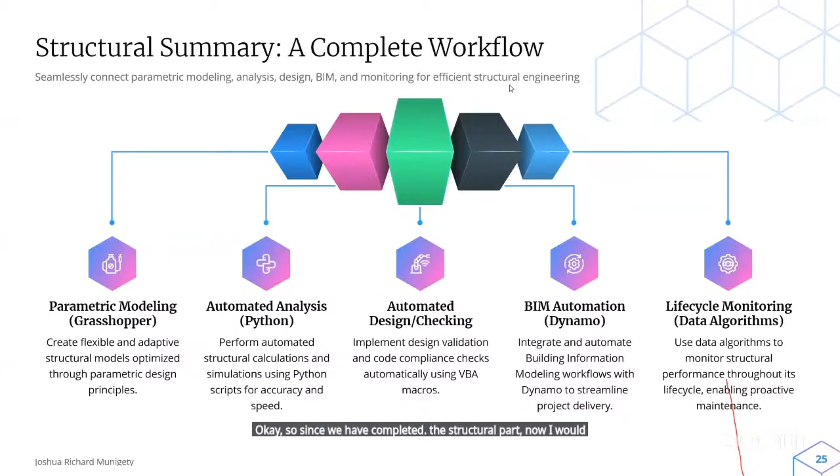Since we have completed the structural part, now I would like to take you to the survey of other disciplines. I want to take a step back and see what's going on in other disciplines. My goal here is to give a holistic view. To be honest, I'm a structural engineer, but I tried to gather as much information as possible on what is going on in other disciplines and how they have parameterized things. I would also like to share that there are many upcoming software tools which it's impossible to put on the screen, but whatever I have known and seen, I've kept it here for your benefit and information.

So first thing is the geotechnical problem. The classic problem for a geotech is that you only have data at a few borehole locations, but you need to know what's happening between them. Programming, like the software I've shown earlier, Python, allows us to take hundreds of these digital borehole logs and use geostatistical algorithms like kriging to interpolate the data. The result is a powerfully programmable 3D model of the subsurface, which is a massive leap forward from 2D cross sections.

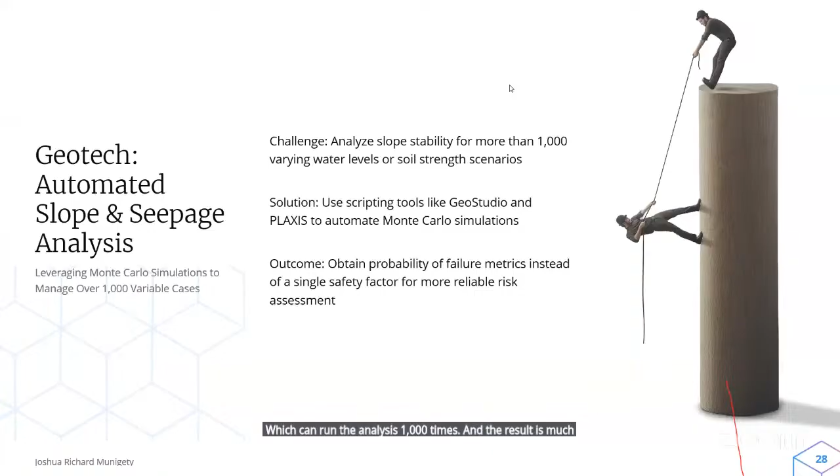The next problem, as you all know, is checking slope stability. But the result is highly dependent on water level and soil strength, which are uncertain. So instead of a single factor of safety, we can write a Monte Carlo simulation, which runs the analysis 1,000 times. The result is a much more powerful probability of failure analysis, which is the same concept we saw in the structural section.

Just like in structural engineering, automation is used for both design and monitoring. Many geotechnical calculations like pile capacity are done in-house using automated Excel VBA spreadsheets, like the ones I've shown before, that check dozens of load combinations. In the field, digital sensors like inclinometers or piezometers are installed in excavations or tunnels. A script on a server then pulls this data automatically and plots tunnel movements versus time, alerting the engineer of any dangerous trend.

Now comes the topic of transportation, which I have focused mainly on traffic simulation and modeling. In software like Vissim or SUMO, you are literally programming the behavior - not like the structural part, but instead trying to model the behavior of individual agents, like cars, pedestrians, and cyclists. You can code their desired speed, their reaction time, their driving aggressiveness, and so on.

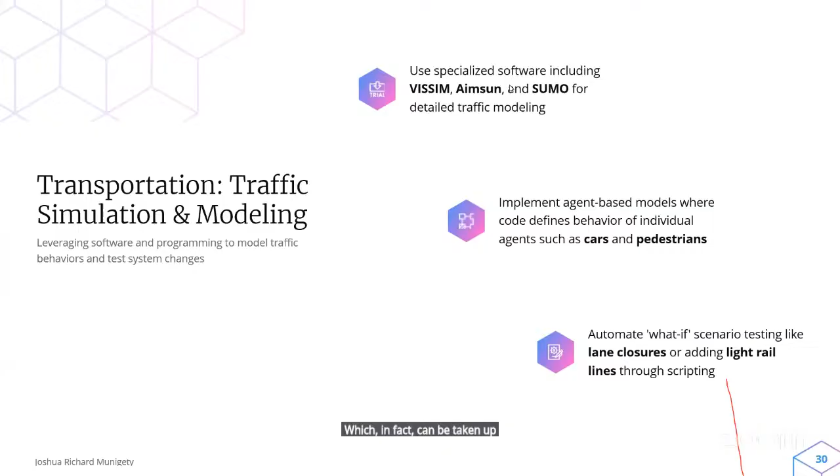This lets us run powerful what-if scenarios on our infrastructure. We can script and test questions like: what happens to congestion if we close this lane? How does a new light rail line impact traffic flow? These are the kinds of prompts or questions which can be taken up as the basic inputs and coded for these kinds of parametric design software.

Of late, we have seen that in transportation, automation is not just in simulation, it's in the real world, because transportation is not like the same kind of examples you've seen from a structural point of view. Everything is connected in the real world for transportation, and we call it intelligent transportation systems.

The most obvious example is an adaptive traffic signal. It's not a dumb timer. It's a system that uses cameras and computer vision, coded to detect real-time traffic flow. An algorithm then adjusts the signal's timing on the fly to clear congestion.

Other examples are automated ramp meters on highways that give a prompt. Even in your day-to-day four-wheelers, you have monitors fitted in the system that detect a sensor where the speed limit is, say, 40 kilometers per hour, and send a signal back to your monitor in the car to slow down your speed, or if you're well below the speed, tell you to go faster. Other examples are variable message signs that are programmed to automatically update.

Then comes the topic of highway design. In highway design, just like in structural design, we use parametric tools. In Civil 3D or OpenRoads, or any software, you can change one curve in the alignment, and all the earthwork volumes, sight lines, and superelevations automatically recalculate.

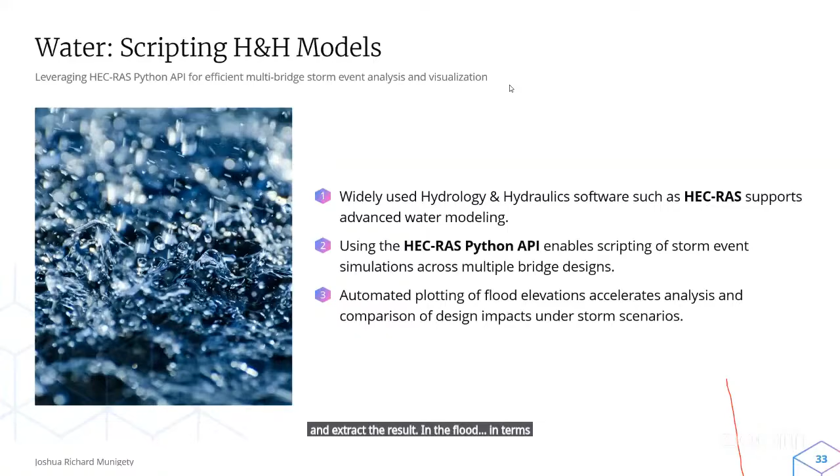We can connect these models to create automated flood forecasting systems. This is a workflow of several tools working together. First, a script runs every hour to automatically download the latest radar rainfall data. It feeds this data as input into a pre-built HEC-HMS hydrological model, which calculates the predicted river flow. A final script checks this flow, and if it exceeds a trigger level, it automatically sends an alert to emergency managers.

There is another platform called SCADA, which is programmed basically as the brain of the plant. It's the code that controls all the physical components. For example, this code is responsible for automatically opening and closing valves, changing pump speeds, and managing chemical dosing.

On the network side, they use genetic algorithms, a type of code, to optimize the system. These algorithms test thousands of pump schedules to find the one that maintains water pressure while using the least amount of energy.

The next part, as we've seen in the latest construction trends, is automation linking the digital model to a real-world time model. 3D is nothing but the model in X, Y, Z. The fourth dimension adds time, and the fifth adds cost. The result is a digital rehearsal, a video simulation of how the building will be built, letting them find clashes in time, not just space.

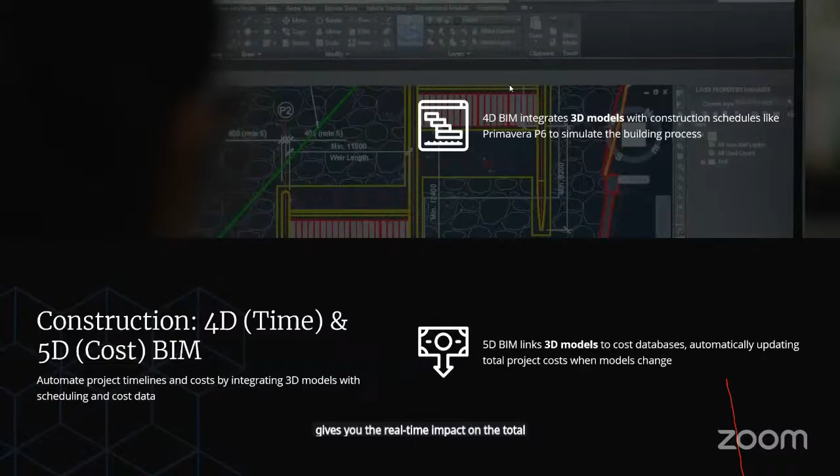Then you have 5D BIM, which is programming the link to the cost database. This is incredibly powerful. It means you can change a beam size in the 3D model, which connects to the analysis model and gives you the real-time impact on total project cost. These updates are all automated.

Of late, the biggest change on the construction side is from drones and computer vision. The automation part is simply that an autonomous drone flies a pre-programmed path over the site every single morning. The programming part is what happens next: the drone creates a 3D scan, which a computer vision algorithm compares to yesterday's scan. It can automatically calculate progress, like 300 cubic meters of earth were moved in area B. That's what we are seeing in the construction industry now. Even more advanced AI can scan photos and automatically flag safety violations, like a person detected in a restricted zone.

With respect to robotics and 3D printing, we have robots that can tie rebar, robotic welders, and even bricklaying robots. The most extreme example is 3D printing, where a giant robot follows a certain path and extrudes concrete layer by layer to print the walls of a house, turning a digital file into a building.

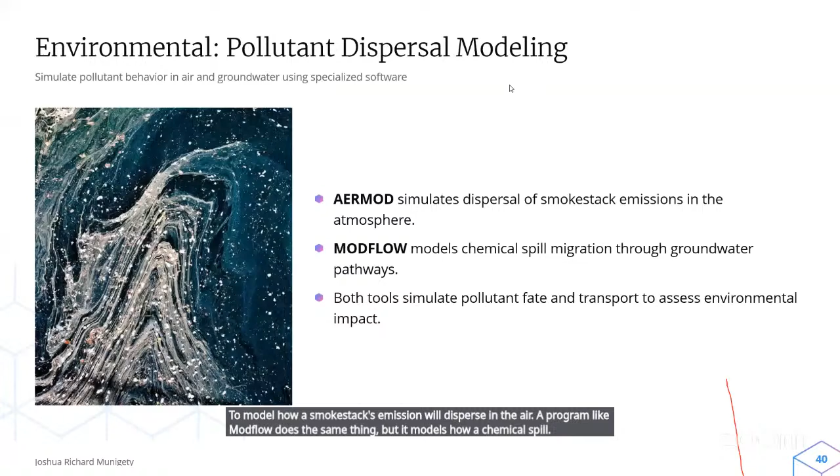Now comes automated monitoring, as just like in structural engineering, monitoring is a huge application. We are seeing the rise of the Internet of Things, networks of low cost, connected sensors that can be placed all over a city to automatically measure air quality, or in a river to measure water quality like pH or turbidity. A script on a river automatically collects this data 24/7. Then the program checks if any values are exceeding legal limits and can generate daily compliance reports for regulatory agencies.

Now comes the end part of this session, on the engineer's programming toolkit, which any current civil engineer following the latest trends is adopting. There are various coding languages, and there's a shift not only on the software side but on the civil side. So a civil engineer, apart from knowing the core fundamentals, whether on the structural engineering side or various other disciplines, should have at least a basic understanding of the various software in current trends. Clients and industries are looking for candidates who are proficient not only in the subject matter but also have these programming capabilities.

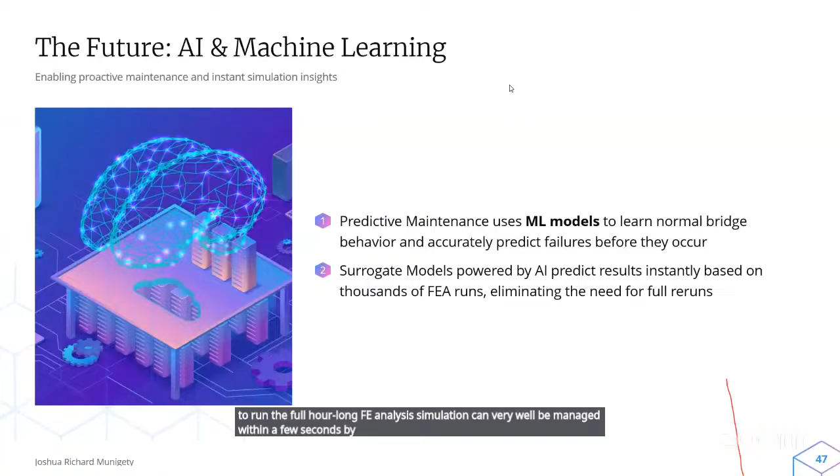The second major trend is computer vision, which is AI that can see and understand images. This is being used to train AI models to automatically identify, classify, and measure every single crack. It's also being used to scan video feeds from a construction site and automatically identify unsafe practices. A really exciting use is AI reading old scanned 2D blueprints and automatically converting them into 3D BIM models.

The final goal, which in fact we in the organization are also working on, is the digital twin. So what is a digital twin? It simply means it's not just a 3D model. A digital twin is a live synchronized digital copy of a real world asset. It combines everything we have talked about: the 3D BIM model, the finite element analysis physics model, and the real time sensor data from the system.

This allows an operator to see the real time stress on a digital version of the bridge. Even better, they can test what-if scenarios. What if an overweight truck crosses now? Or what if a 5 magnitude earthquake hits? They can run the simulation on the twin before it happens in the real world.

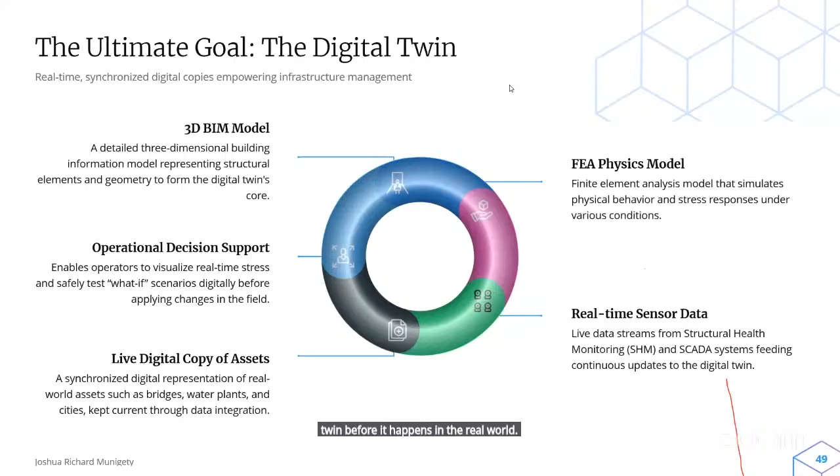As I said, it's the start, and I'm not saying we are all accustomed to these skills, but I can only request and convey to you that it all sounds great, but it's not a perfectly easy transition. There are real challenges. The biggest one is the skills gap. We need engineers who can code and coders who understand engineering physics. That's a rare combination.

There's also simple human inertia. We hear that we have always done it this way in every office. We need to be flexible to welcome these types of challenges, and also these kinds of rookie ideas, into our civil engineering industry practices.

And interoperability is a huge technical hurdle. Getting Revit or SAP and Excel to all talk to each other is still very difficult. And finally, a new legal and ethical question: if an AI generated design fails, who is liable?

That's the question which I leave it to you. It's ultimately at the end, the engineer. Whatever I say with respect to AI, eventually we are all engineers again to check and ensure that those numbers make sense, which eventually make us deliver a safe design.

This all leads to a new model, which I call the T-shaped professional. The vertical bar of the T is your deep specialized knowledge. For me, that's structural engineering, or be it any kind of specialization you are in. The horizontal bar is a broad knowledge of other domains, and critically, a knowledge of programming, data analysis and automation.